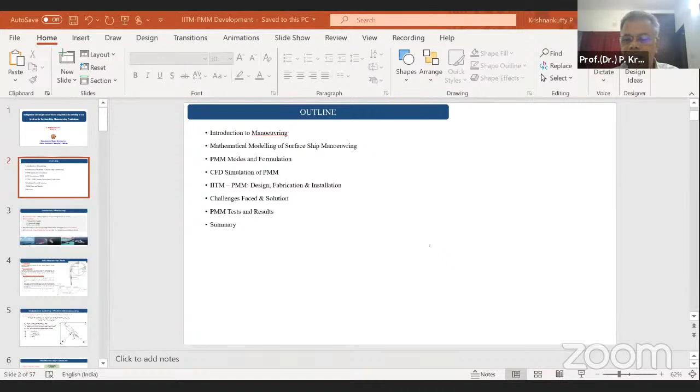So just coming to the topic, what I would like to present here is indigenous development of a planar motion mechanism experimental facility at IIT Madras for surface ship maneuvering prediction. What it means is, maybe there are people not from naval architecture background, or people who learned naval architecture might have forgotten about PMM. PMM is an experimental facility called planar motion mechanism. Sometimes people use HPMM, horizontal PMM, primarily used for surface ships, not for submarines. In the PMM, it is an add-on facility to a towing tank facility, where resistance and propulsion experiments are carried out. In the PMM facility, you fit a model and subject it to different modes of prescribed oscillations, and measure the hydrodynamic reaction forces and moments. This data is used to get the hydrodynamic coefficients, or hydrodynamic derivatives. These derivatives are used in equations of motion representing surface ship maneuvering. Along with that, you put rudder and propeller effects, then solve the equation to get velocities and subsequently integrate it to get the displacement or trajectory of the vessel.

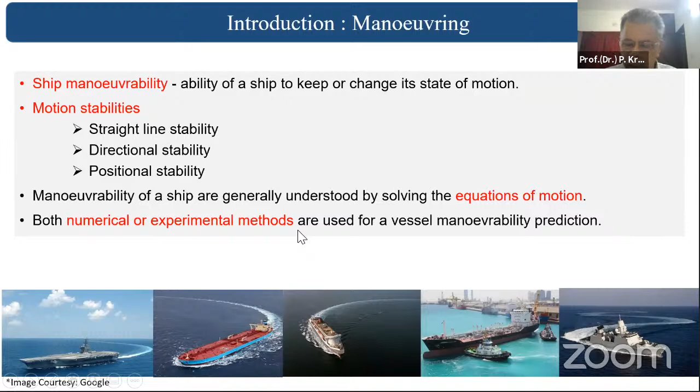So to get the prediction, as I explained, you can use numerical methods or experimental methods to determine the hydrodynamic derivatives. Now, the IMO has set criteria for maneuvering of ships.

These criteria need to be met for the ship to operate. Nowadays, IMO is insisting these things be verified even at the design stage, using CFD methods. Also, maybe just prior to finalization of the design, it's better to go for an experimental method to ascertain the maneuverability of the vessel and check whether the parameters are within the IMO specified criteria. I'm not going into the criteria details.

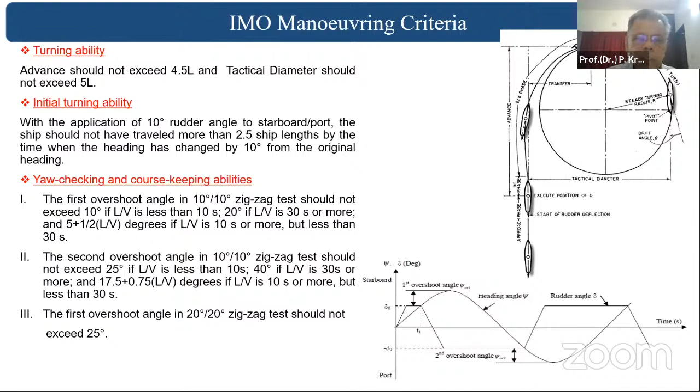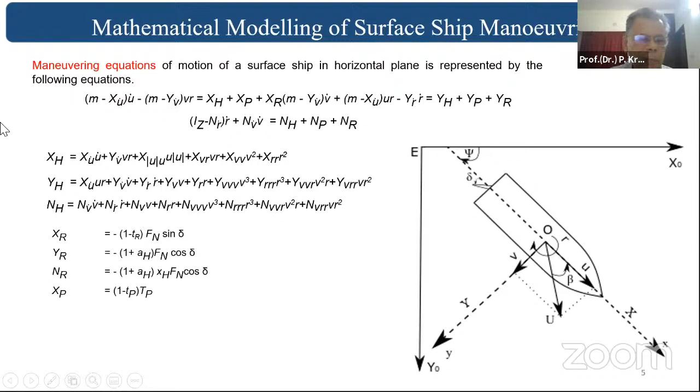I think there's some mismatch here, the equations are merged together. These are three equations that got jumbled up. This is basically the surge equation, and from here the sway equation starts, and then here is the yaw equation. These are the rudder and propeller derivatives which are used, and these are the hydrodynamic coefficients which appear in the equations of motion.

Now when you come to ship maneuvering, the approach used is in model tests. In the prediction, you go for the experimental method with a ship model. You can do straight away the free running model, where the ship model is fitted with a model propeller and model rudder, and the propeller RPM will be adjusted to get the required speed, and the rudder operated to get the required trajectory.

So that is what is done, it's a free running model, where the model itself runs with its own model propeller and rudder. Another approach is determination using the modular method.

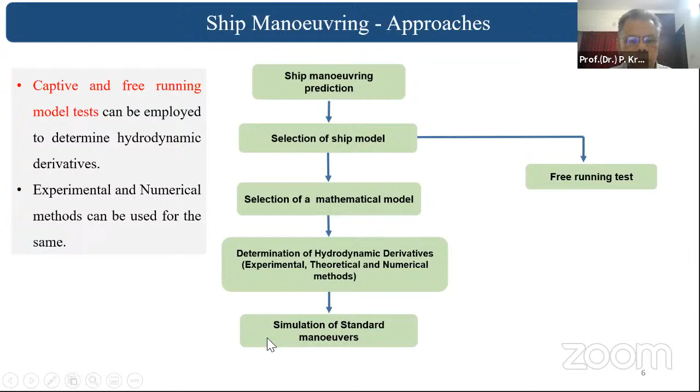In the modular method you use a mathematical equation. As I explained before, you estimate the hydrodynamic coefficients appearing in this mathematical equation, and then solve it to get the vessel trajectory. Then you can find the turning circle or zigzag maneuver and check against IMO requirements.

If you look at the PMM modes and formulation, this is a conventional PMM method where you have two oscillators, one at the stern and one at the bow. These two oscillators can be operated independently, and you can control the phase difference between them to get the required mode of motion in the PMM.

At each position you may find load cells which measure the loads, and you can estimate the moment from the displacement, the distance between these two struts.

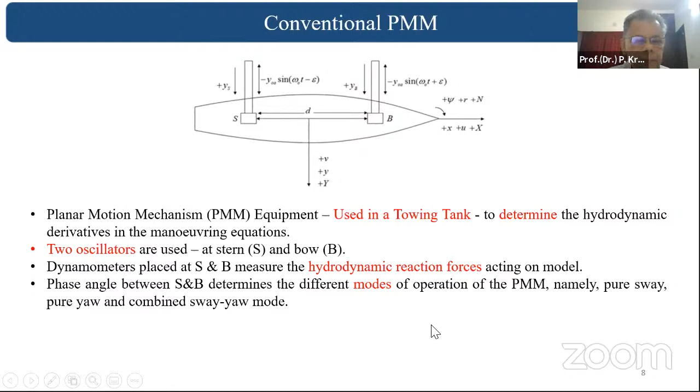So these are the different modes considered in the PMM. This is pure sway motion, where the model axis always remains parallel to the axis of the tank. You can see this line shows the axis of the tank, and the model axis remains parallel, oscillating like this, so this is pure sway mode.

When it comes to pure yaw mode, the axis of the model is always tangential to the path, which is always the case, so this is called pure yaw mode in PMM oscillation. You can also use combined sway and yaw, where you give a drift angle.

You can see here this model, the drift angle is given and it follows something similar to the yaw motion. So you get combined sway and yaw. The drift angle gives a sway effect, so this is a combined yaw and sway motion.

So these are the three modes of oscillation in PMM, from which you will be able to get all the required hydrodynamic derivatives which appear in the maneuvering equations of motion.

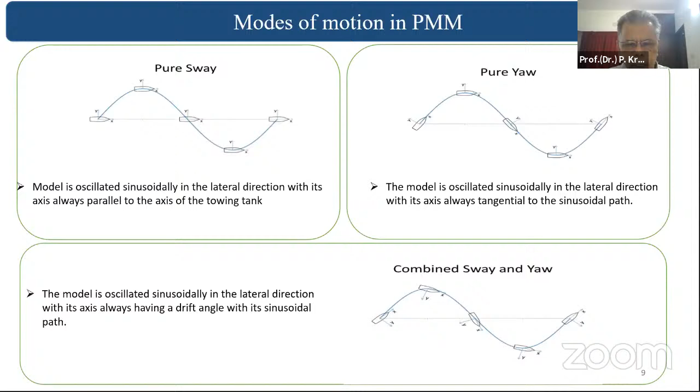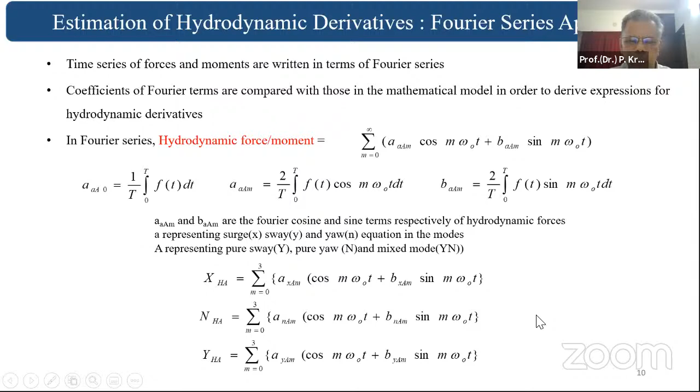Once you perform the test with these modes, you get the force history, or you record the force history, and you can use the force history, which is sinusoidal in nature or maybe oscillating, and represent it using a Fourier series, as shown here. From the Fourier series coefficients, you will be able to estimate the hydrodynamic derivatives. That's the process involved through which you get the hydrodynamic derivatives.

In this present study, what we have done is use the KCS container ship, which is an international benchmark being used by various leading researchers around the world. So we also selected this KCS model for the study so that we could compare it with international results presented by different agencies from across the world. So we just went for the same ship.

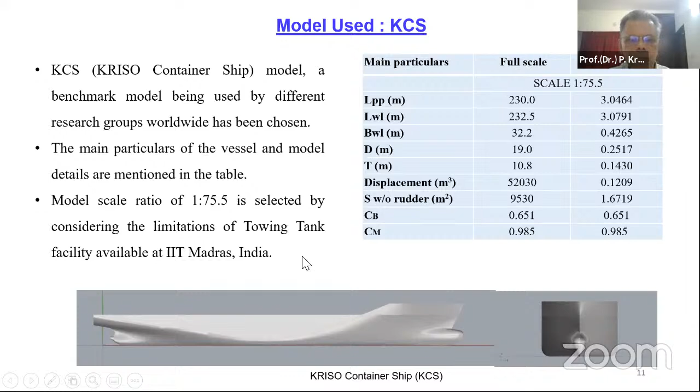This is a fabricated model. The model has been fabricated in our in-house facility. This is the model of the container ship, the KCS model. This is a model propeller which has been made using stainless steel material. You can see that stainless material, and also this is the rudder.

So this is what we have used. We use a rapid prototype machine for that.

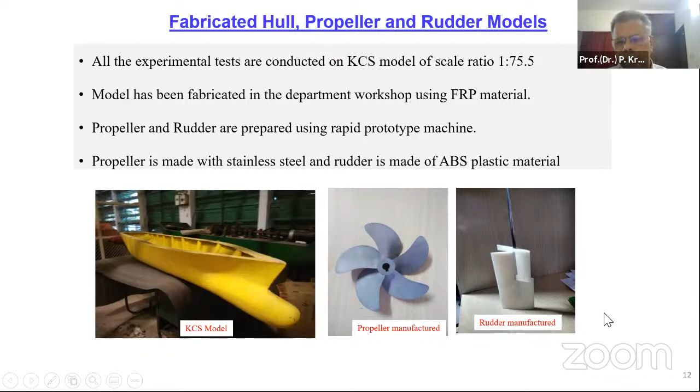Coming to the experimental PMM setup, you can see this is a view of the towing tank of IIT Madras, and there's the carriage what you see here, and you can see the PMM is already erected in this. There is an open space inside the carriage through which the PMM facility is attached, and the model is fitted to that, and that model is subject to oscillation.

You can see the details of the arrangement here. This is the opening which we get in the carriage. The opening available was only 3 meter by 1.35 meter. We had to utilize that space to accommodate the PMM plus the model and all the setup. So that was a big challenge.

We went through different difficult situations, because we could not alter the carriage, we could not alter the towing tank, because that is meant for other experiments. So we had to find a facility, utilize the space, and accommodate the setup.

So here you can see this is the PMM setup. These are clamped, you can see there are 4 clamps which are clamped to the carriage, this bar. So this is actually suspended, rigidly suspended from this bar.

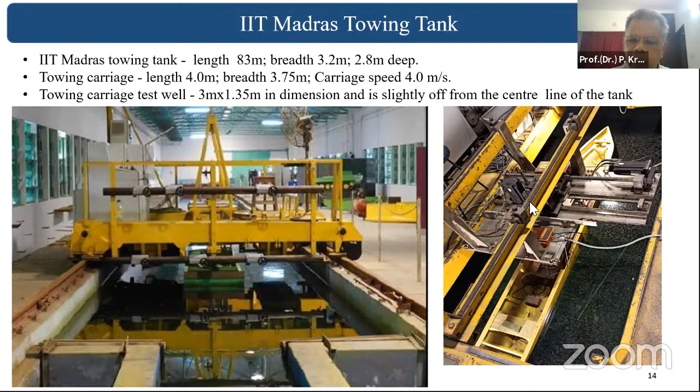You have to use this with a program which will give the required motion mode for the PMM. So the process was design, fabrication, installation. Initially, we had to find out what is the capacity, what load is coming on the system, what load is coming on the load cell. We had to make an estimation of the amplitude limitation and the frequency limitation of oscillation. All these things were judged or estimated based on the space availability.

So we found that up to 400 mm sway amplitude can be obtained, and a maximum yaw amplitude of 15 degrees. If the yaw amplitude is increased, it may go and touch the tank boundary.

So the frequency also we have looked into. Based on which we are in a position, and we also know the model size, everything, we estimated the total expected force and moment, based on which you have to design the structure, the load cell, and subsequent components. So all these preliminary estimates have been done before finalizing the technical specification for the PMM facility.

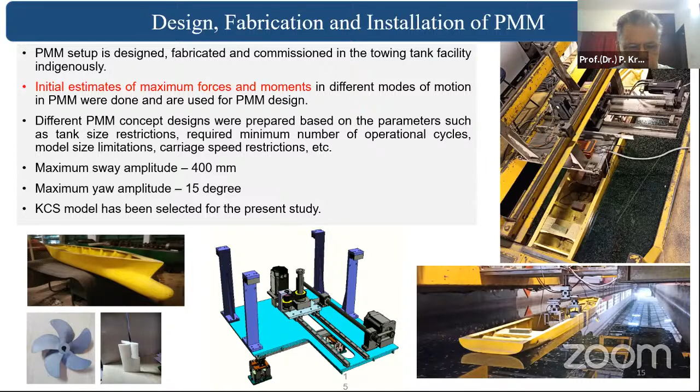And once that technical specification has been made, it has gone through various revisions and discussions, and finally it went for the tender notice. It went for bidding, and finally we could get the right bidder, fabricator for that, and so that's how it's installed.

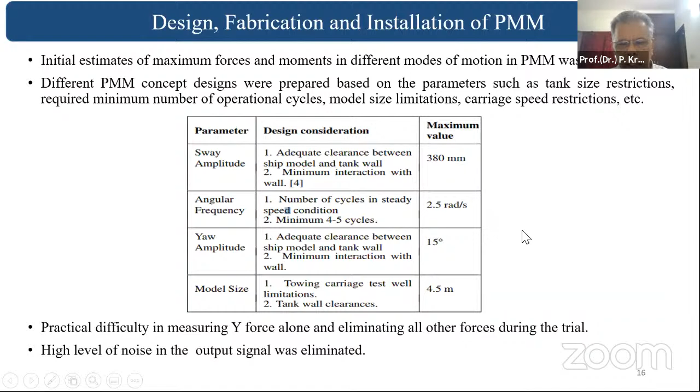This is again the frequency. You can see that maximum 2.5 radians per second, and the amplitude has been reduced marginally through 380, 15 degrees maintained for yaw amplitude, and model size maximum 4.5, but the model size which we use is only 3 meters. Another important thing to keep in mind is that the tank length is only 83 meters, and minimum 4 oscillations you should get for the PMM, and the oscillations will start only after reaching steady speed. So we have only limited space, and in that limited space, 4 oscillations, so all these restrictions come into picture.

So now these operations, this is a more close-up view. This is the sway motor, and this is a belt. The sway motor is controlled, and then the belt drives this lead screw, and you can see there's a bearing unit which moves, and the model is connected to that. The model gets moved with that. This shows a rotary motion.

That's for the yaw motion. So in yaw mode, only this motor is operated, this is not required to be operated. But when it comes to sway mode, this is operated. In yaw mode you have to use both, and also in mixed mode you have to use both.

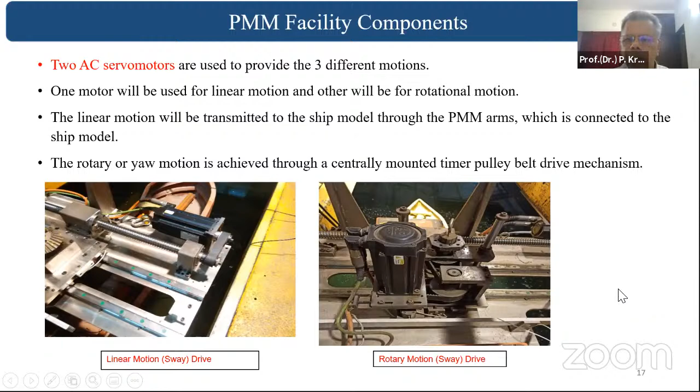So that is the arrangement. Coming to the load cell mounting, you can see the load cell mounting here. There is a load cell kept here, so the reaction force coming on the model needs to be restrained with the load cell inside. The mechanical system has been developed like that, and only the X force and Y force, or tension force, has been measured using the load cell.

The load cell used is a single component load cell, which has been used in this setup. We have two of these kept at the forward and stern positions, the equivalent positions. This load cell readings go through a signal conditioner because there will be a lot of noises generated. The signal conditioner is an electronic system to some extent, and that data is fed to the system, or it is recorded. That's the measurement system.

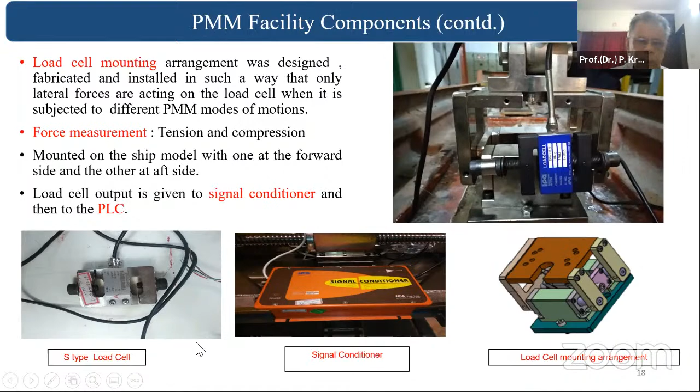So the operation of the PMM is done by a drive control panel, which is again placed inside the carriage. We could find some space for this whole unit, which is a control panel, a cabin for the control units. This shows the inside view of the control panel. This has been developed.

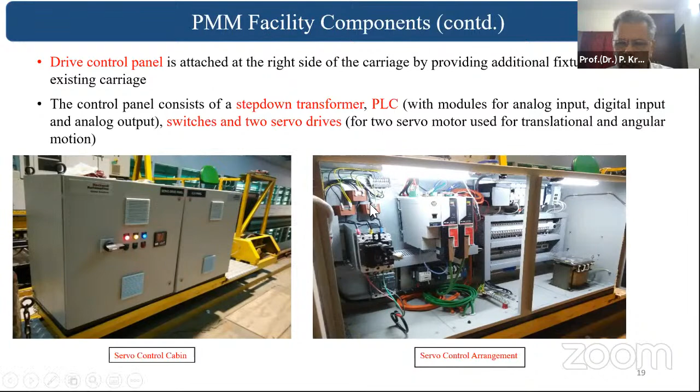And then the whole operations are controlled using the PLC, which controls the movement of the two servo motors, that is the yaw motor and also the sway motor. By changing the parameters, which can be put into the HMI monitor, you will input the information using a user-friendly menu, and that is transferred to the drive system, and the drive system operates the PMM system.

Okay, now this is another view of that. This is a view of the model. This is a different model, I think, which is kept here.

And here, this is a system. If you look, this is a carriage. You can say this is the HMI here, and then you have the carriage system. The carriage is driven by 4 motors, and that is the arrangement inside the carriage.

Then from this, you have the PMM frame. There's a connection for the sway mechanism, and another one for the yaw mechanism, and finally it's connected to the ship model. By using the PLC and the drive system, these mechanisms are driven in a controlled way to get the desired mode of motion with the desired amplitude and frequency. So that's how this is controlled.

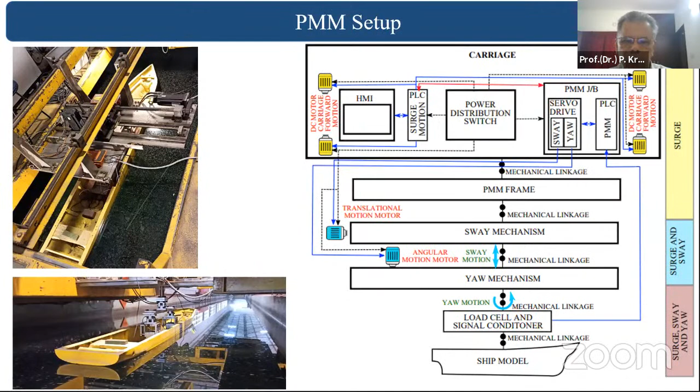So this is already discussed. There are motors here. You can see this is a computer model and this is the actual one. The diagrams show where the motors are kept.

This is the yaw motor. You can see from here, this is the yaw motor, sway motor, this is the yaw motor, and then the lead screw. So all these mechanisms, these are the mountings - the violet color are the mountings, and the green one is the bar, which is part of the carriage.

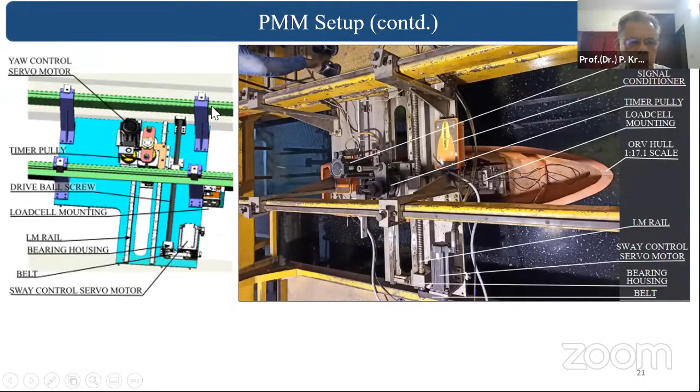So the mounting arrangement is also explained, this is a mounting mechanical system. This will get mounted onto the base of the model, with the load cell giving the reading at the 2 positions.

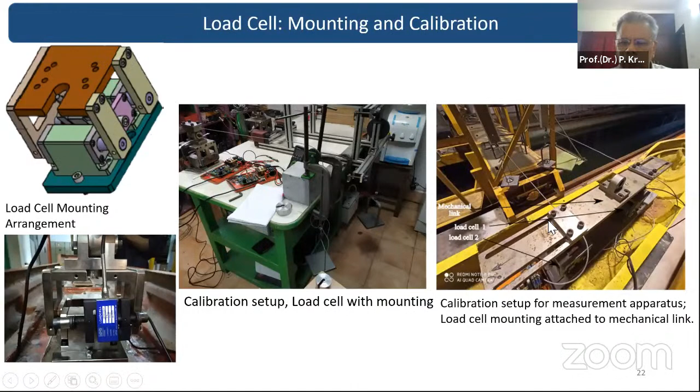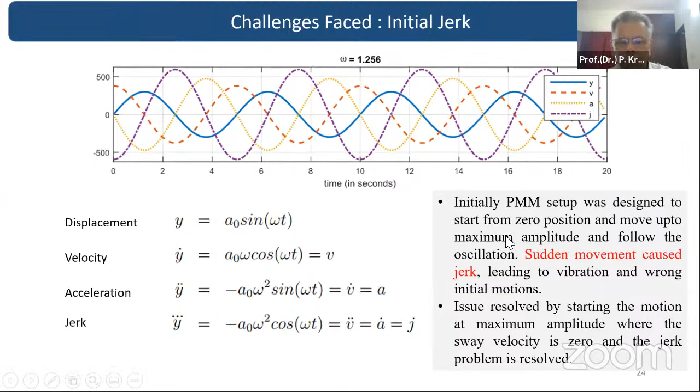So this shows the oscillation. We faced some problem - there was some jerk, oscillation initially. This translation or deviation is caused by the bevel gear system, which has gear teeth giving vibration and also a jerk. So these problems have been identified and rectified.

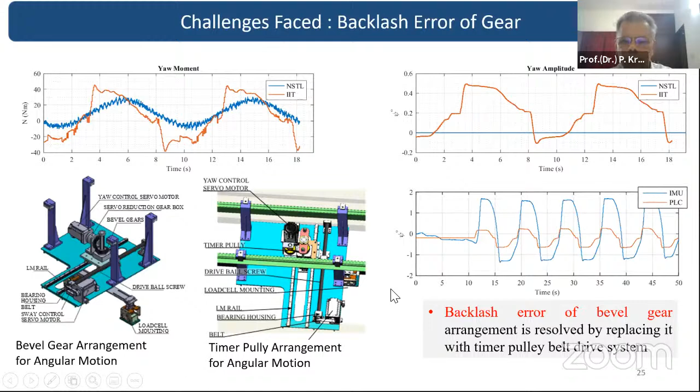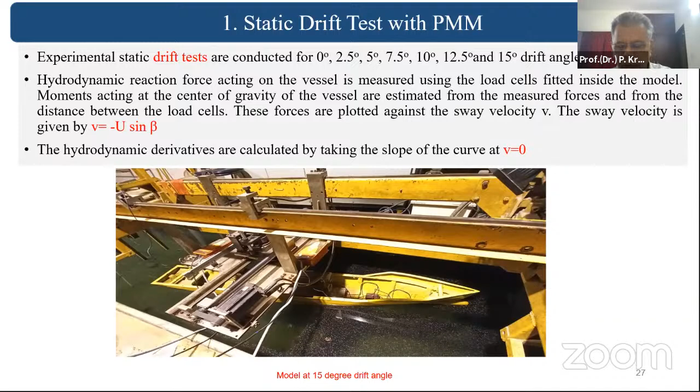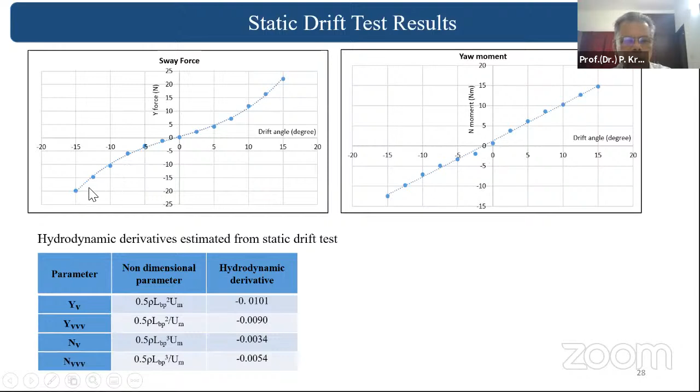You can use PMM for that, and also for the oscillation test. So what you do is for different angles you plot the forces, and from which you can get the derivatives.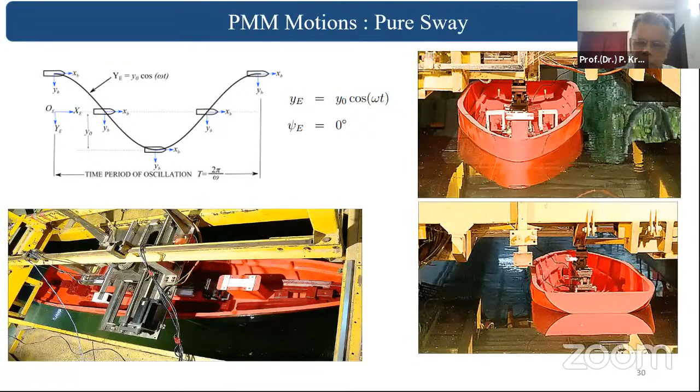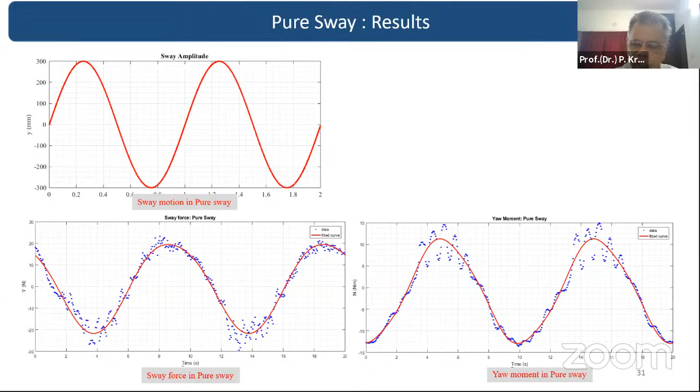Dr. Rajesh, are you able to see the video?

Rajesh, you're there? Yes, sir. Seeing the video, right?

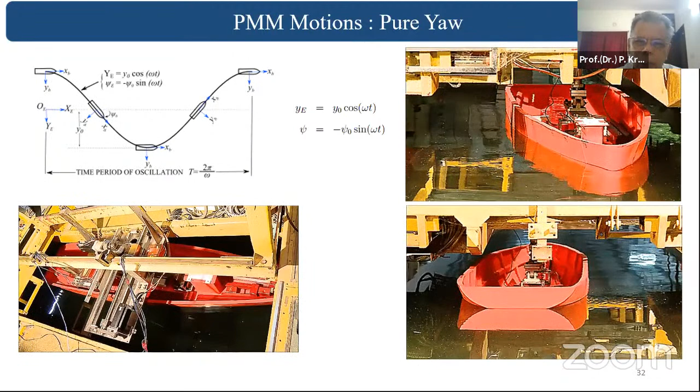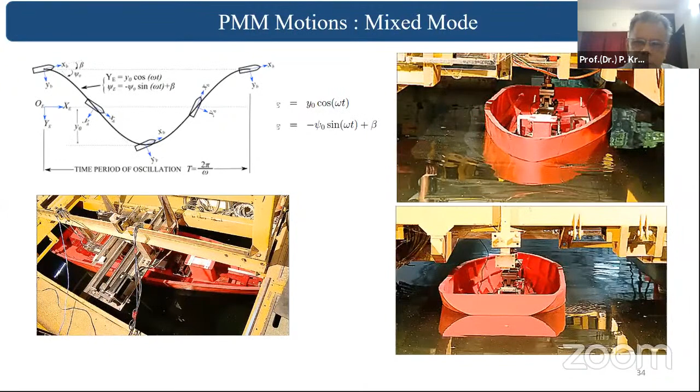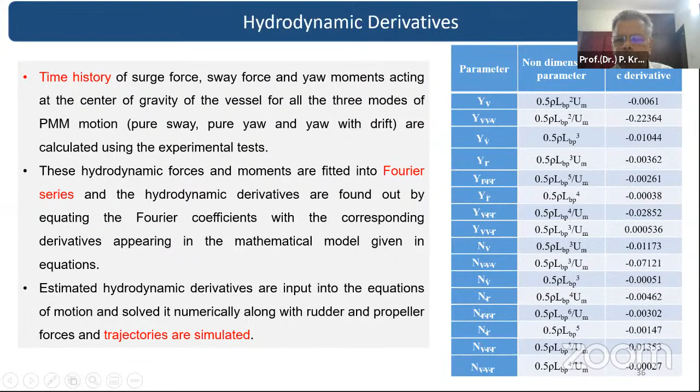Once you get the hydrodynamic derivatives, as I explained before, you get into the mathematical model defining the surface ship maneuvering. Then you substitute these hydrodynamic derivatives in the equations of motion, and also include the rudder and propeller derivatives. Then you can solve this equation, that is the sway and yaw equations jointly, and after substitution you get the sway and yaw velocities. Then you integrate it, and you get the x and y coordinate of the vessel against time. So that is what you get.

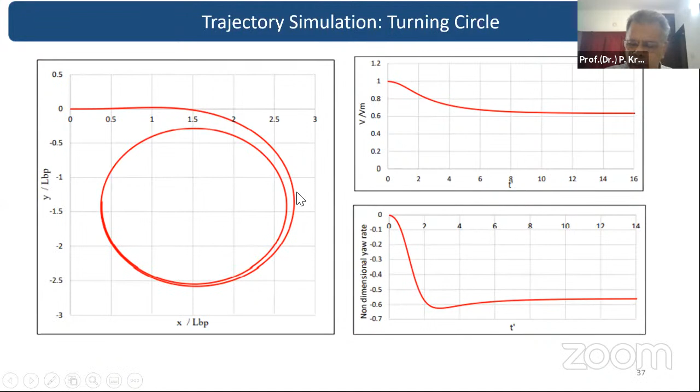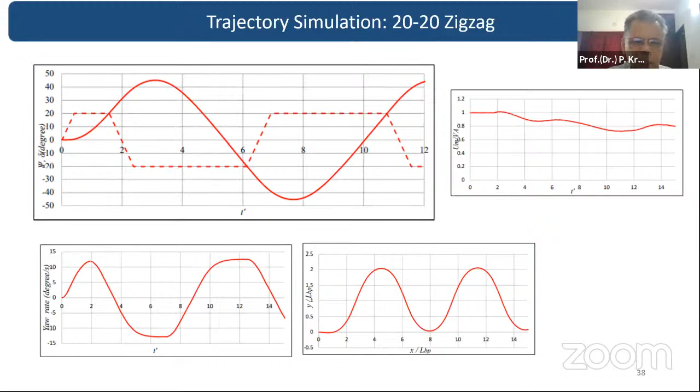So if the trajectory is a turning circle, I think in this case the rudder is put to 35 degrees, and then a turning circle maneuver is performed. That's how it's predicted. Similarly, you have a zigzag maneuver. These are the two things which you have seen in the IMO slide, which prescribes the zigzag maneuvering parameters and turning circle maneuvering parameters. So you can simulate that here.

The same model has been taken to NSTL Visakhapatnam, where we could use their new facility, the maneuvering and seakeeping basin. We did a free running test and also the PMM test there, because we wanted to check the values obtained from an already established facility and how it compares with the facility which we developed. So this study was primarily for validation of the PMM facility developed at IIT Madras.

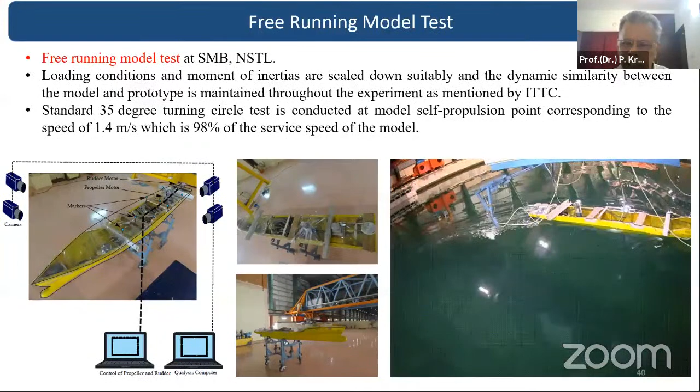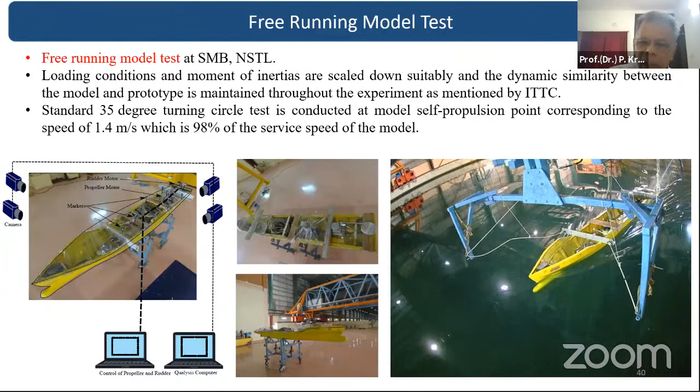So this was also a hectic task. We had to take the model to Vishakhapatnam. That team had to go there, and of course the NSTL scientists helped a lot in setting up the whole thing, and they were lenient in providing the facility to us, so we are thankful to them for accommodating us there.

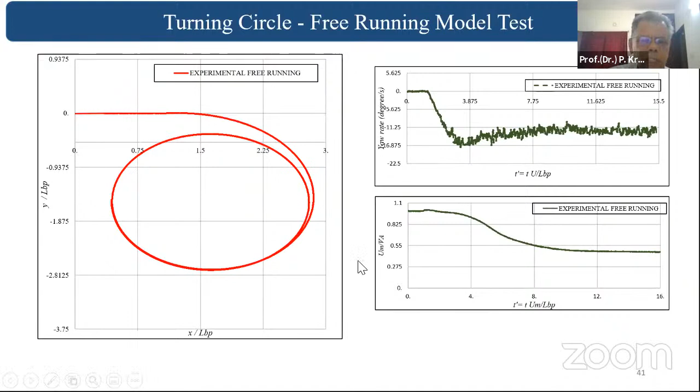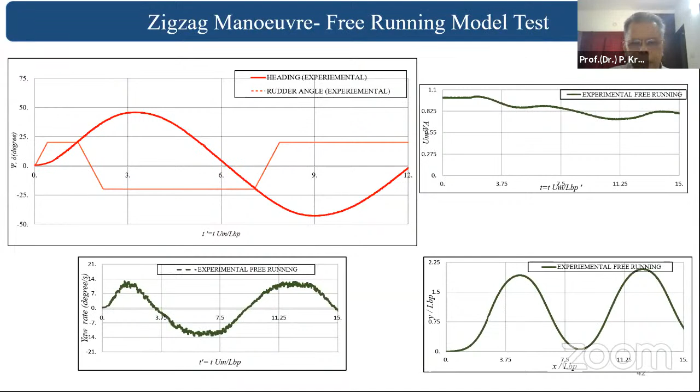Subsequently, this is a turning circle maneuver which has been done, the video which you have seen. If you look at the trajectory, this is how it's obtained. So these trajectory values are compared later. This is a zigzag trajectory for the free running model test. When you say it's a free running model test, that means the model is run with the help of its own propeller and rudder, and it is controlled.

So subsequent to that, what we did is, most of the PMM facilities work in deep water condition. This is fine when you talk about ocean going vessels that operate in deep sea conditions - the hydrodynamic derivatives you get from this type of test in deep water conditions are okay. But when the ship comes into restricted waterways, particularly when it operates in inland waterways or rivers or maybe in harbor areas, the shallow water effect comes into picture - that is the feeling of the bottom. It's not that the ship is touching the bottom, but when it's getting closer, when the under keel clearance is less, the effect will be more. So we wanted to study that effect using the PMM.

So we wanted to have a platform, and the platform should have an adjustable water depth. The platform should not be a permanent fixture - it should be detachable, removable, handled properly, and give sufficient length. All these problems were there, so we did the calculations and went ahead with the design. We found that one piece should be 1.5 meters along, and the width is 3 meters. So that is how it's done.

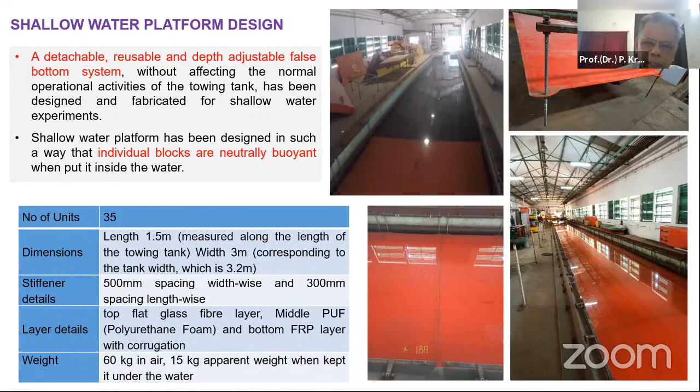We had an arrangement for lowering and changing the water depth, or changing the level of the platform. So we did the studies, and the PMM with the ship model operates over it, so we get the shallow water effect with this facility development. This means we had developed a PMM facility which usually works for deep water conditions, and we developed a platform with adjustable depth which could give the shallow water effects on the maneuvering characteristics of the ship. So these are different modes done over the shallow water. You can see the red color below - H/T, that is water depth to draft of the ship model, is 1.2.

This is a really shallow water condition. You can see the operations. Subsequently, we predicted - I'm missing many steps in between - what would be the effect of this shallow water on the trajectory. You can see that if it's deep water, it's coming very close, only this much, whereas in shallow water it may go up to very large. That means a vessel operating in shallow water region takes much larger space for a full turn compared to the same vessel operating in deep water condition.

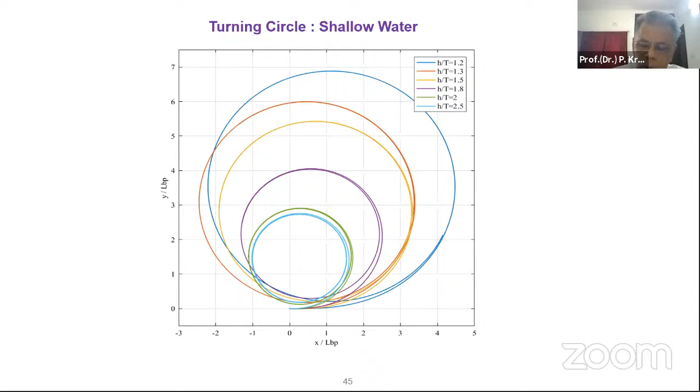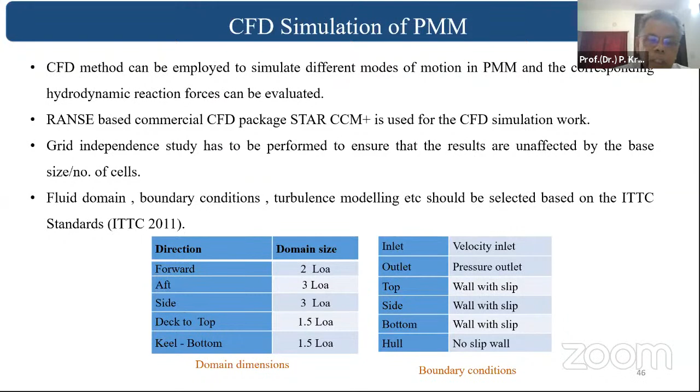So the vessel, when it enters the shallow water region, needs to be very careful because the controllability becomes very difficult and sluggish. We also did some CFD analysis. I'm not going into the details of that - maybe time is a constraint.

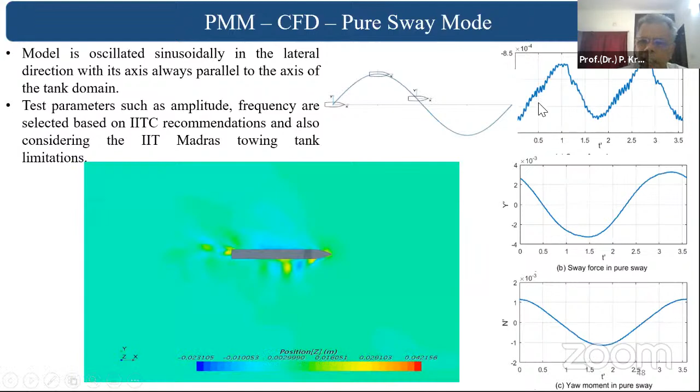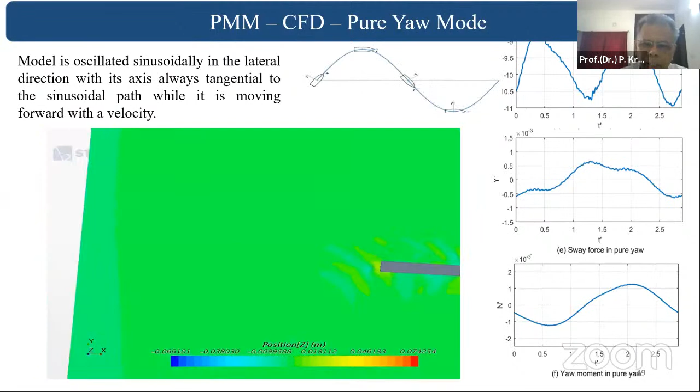So this is the modeling part and parameters. We simulated the pure sway mode, pure yaw mode, and these three modes. You can see how this CFD analysis works - on this side the force histories here, and this is for the pure yaw mode. This is in the CFD environment. Of course this is not matching with the title, but I thought maybe I'd just show you this CFD analysis and how it's compared with the experiment.

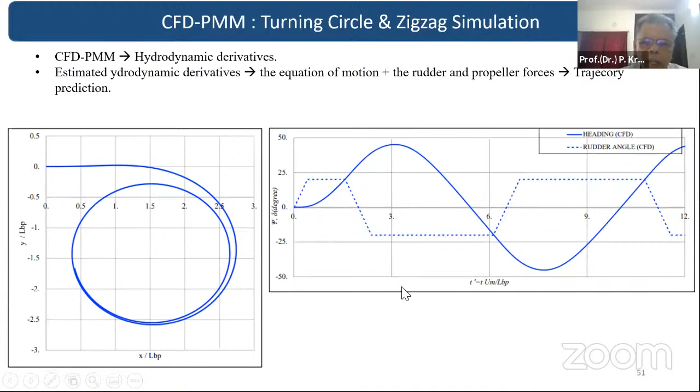So from the CFD we estimated the turning circle and zigzag maneuver. Also in the CFD environment, we did a free running test with the same model size, same model parameters. You can see them running. The whole domain - this is a relatively new option available in the Star CCM CFD package - saves a lot of computational effort. Otherwise you have to identify the whole domain and do the analysis, which is a hectic thing. Now here, this option allows the domain to move, oriented with the vessel. That's how it's done.

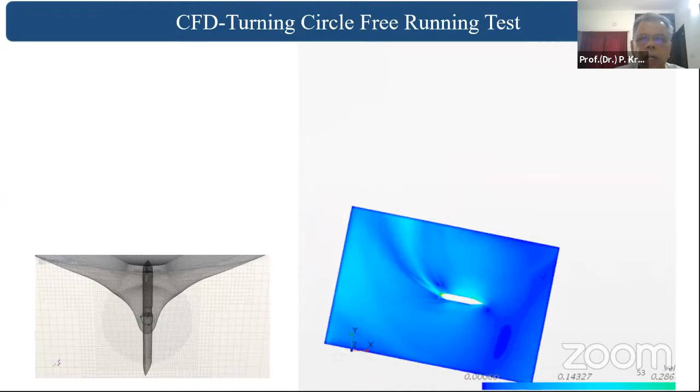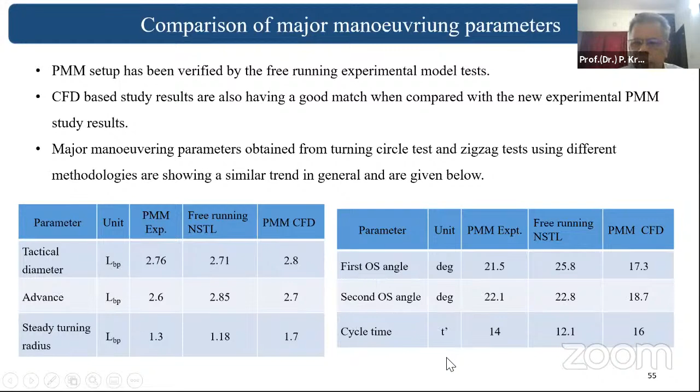First thing is it's indigenously developed. You have to know that PMM manufacturing, supply, commissioning - everything is a monopoly of a company in UK, Cussons. I think recently it has been taken over by a company called Trumpers. We approached them to give a quote for the PMM facility in our towing tank. A few years back, maybe 7-8 years or even before, they quoted 4 crores - okay, for a small facility. We did not have funding, and IIT would not support this.

So then there was a thought to go for an indigenous solution. There are other advantages: maintenance and repair become easy, it's locally available, and cost is less. We gain a lot of expertise in the PMM mechanism, and also can do modifications if required. We are in a position to do it now because we developed it ourselves. It involves basically a lot of mechanical systems, electrical systems, electronic systems, and control systems - many things that need to get integrated into such a facility. So we took the challenge, did it indigenously, established it, verified it, calibrated it, and shown that it's working fine, no problem.

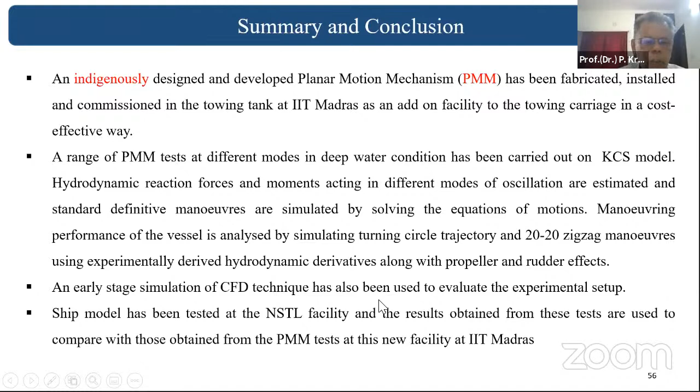So this is what it's all about. I'd like to share with you for today. So maybe if you have any questions, I'm willing to take them. We still have some more time.

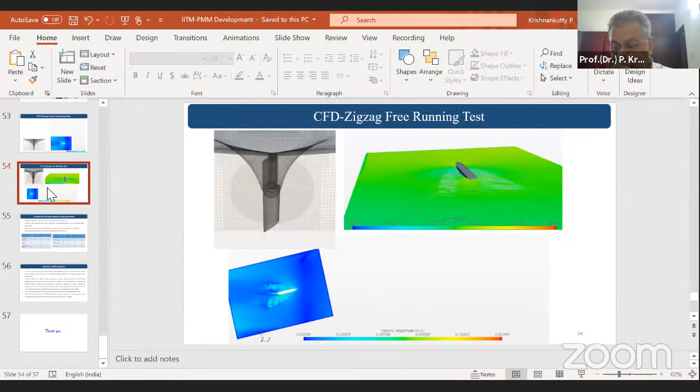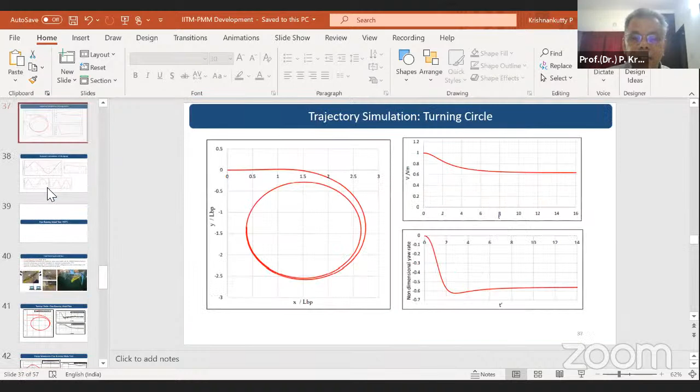Basically, the system is mounted on a carriage. Maybe I think you are referring to this one, right? Yes. So these scatterings are basically the noises which are coming from the carriage movement. The carriage is operated by 4 motors, and it's moving on a rail. The rail you cannot expect to be perfectly smooth, so the rail movements give some noise, vibration, and also the PMM system, when it oscillates, along with many mechanical systems which are used, may induce some variations.

So this we have to eliminate. Even though the signal conditioner is there, still some of the data is not eliminated. So what we do is we make a fit to the points, a mean fit, and based on that, the curve is used for further analysis, for the Fourier series representation and further analysis.

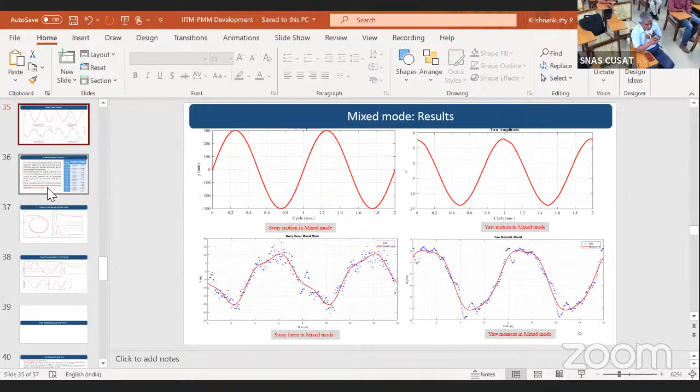I have one more question. In your CFD analysis, we can see that the wake is touching the boundary. Is this a cause of concern? CFD here? Yes, in your moving domain analysis.

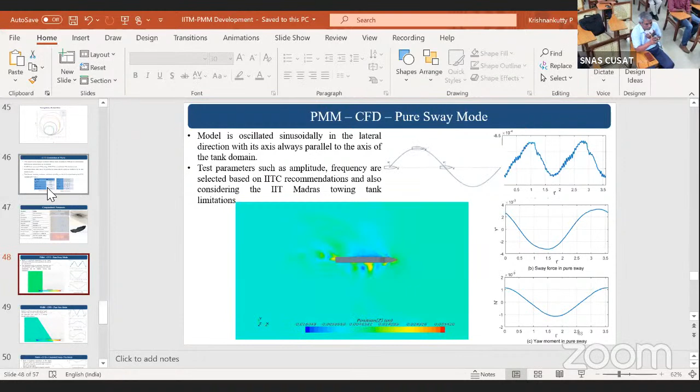Moving domain analysis, okay. Here. Yes. Okay, the wake is touching the boundary of the domain. No, the thing is the vessel has already crossed the wake area, and the vessel is not moving at a very high speed where you'd expect the wake to overtake the ship, and also the whole test is done within one cycle. If you are doing it, then it won't get into the wake of the next cycle.

So that wake effect, I think you see all these domain dimensions are based on the guidelines of ITTC. So that's how it's taken. I think we have followed that criteria, and we have gone through the publications and also ITTC guidelines for CFD simulations. So that has been taken care of while the analysis is done. So I think it's not going to influence the results. Okay, thank you very much.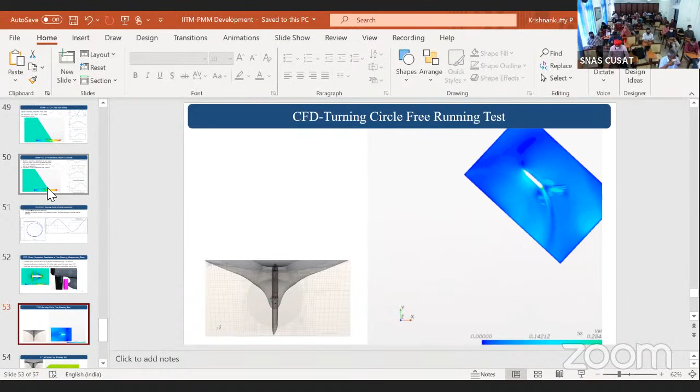Any more questions? Good morning, Professor Krishnankutty. This is Manoj from Ship Technology Department. Morning, Manoj. Sorry, sir, morning, I'm just pushing back. Yeah, that's it.

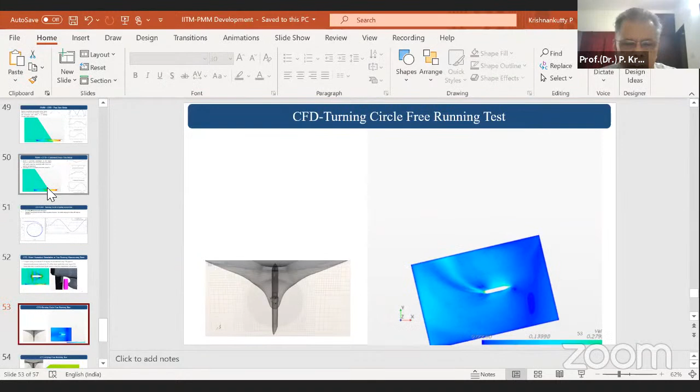Just a follow-up question on this very aspect that Dr. Ebenezer has asked. In reality, when you do this experiment in a wave basin or a maneuvering basin, you're basically entering into its own wake, right? It's that memory effect. If you're going over and over, then you have this problem.

Can you come back once again, sir? No, if you're doing a test, if you're taking a circle 2 times, then the second time it will be in the wake of the first turn. So the resistance or whatever parameter that you measure might be slightly different from the first complete turn that you have measured, right? If you are doing the experiments, will CFD take that into account?

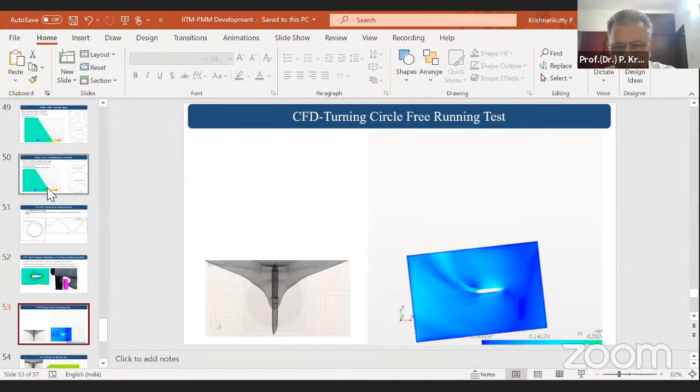Yes, well, of course, CFD takes care of that into account. So now the question is the wake, whether it's affecting. Here the thing is, actually what we are trying to, in the free running case—you're talking about free running cases, right? Okay, so in this free running case, what you have is you are looking only at the trajectory position. You are not measuring any forces or moments here.

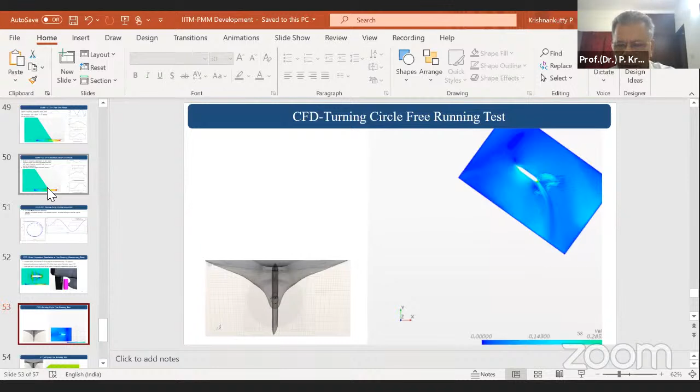So you measure only the trajectory. That information is used. That's only in the rotating arm that becomes an issue. No, when you consider the prescribed motion, like PMM or rotating arm technique or drift test, there you have to be careful about the water condition, so that it doesn't affect the reading. Whereas here, as you said, it may affect the subsequent turning, but the influence has been found to be insignificant. If you are doing a free running turning, the subsequent cycles almost follow the previous cycle. So it's not a problem as noticed so far.

In your presentation, you said the maximum sway amplitude is around 400 mm, right? Did you see any wall effect interfering with your tests? That's also a good question. Actually, we have checked with ITTC requirement, what should be the maximum amplitude in relation to the tank width, and also other parameters. We also checked the space availability in the carriage of IIT Madras. Considering all these aspects, finally we restricted the maximum sway amplitude achievable to 380 mm.

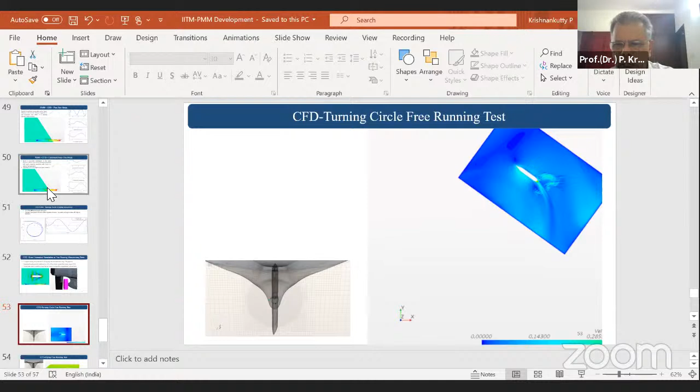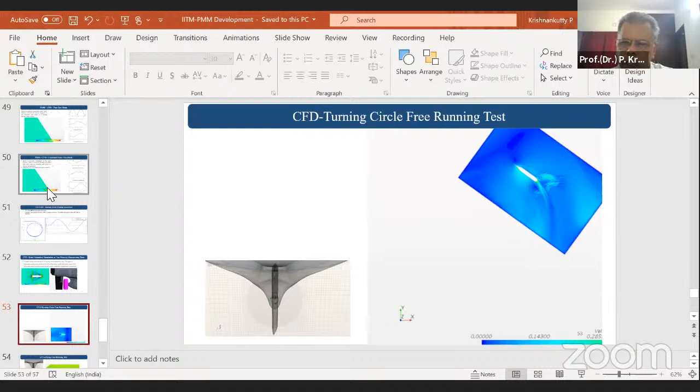So all the subsequent calculations regarding displacement, velocity and acceleration, and subsequently the forces, were based on this. We also looked into the frequency of oscillation, how much maximum frequency it can go. That frequency depends on the speed of the carriage and also the length availability of the tank, because you need a steady oscillation to get the correct forces. To get the steady oscillation, you need to perform at least 3 or 4 oscillations. So for 3 or 4 oscillations with the assigned speed of the carriage, what is the length of the tank required? Considering all these aspects, we estimated the maximum and minimum frequency it can go, and the speed it can go. So all these constraints depend on the restrictions of the towing tank facility.

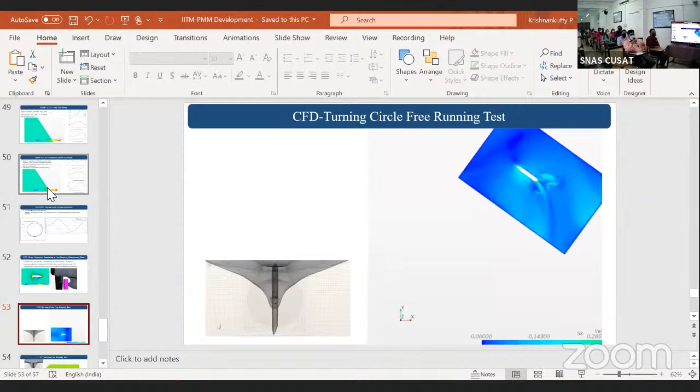The other question I have is regarding the shallow water test. How did you manage to fix that false bottom? Is it clamped on? It's a big challenge. When you're using the existing towing tank facility, you cannot tamper with it. So what you have to do is make a setup in such a way that, without tampering with the existing facility, you can erect the platform.

That's a good question. On the rails, you can see they are mounted onto the wall, and in the mounting arrangement we have a nut and bolt. We found there is a nut, I think 1 inch or maybe 1.5 inch, protruding out everywhere. So what we did is use that space - we put a clamp on this nut, and through the clamp we supported the platform.

So you can adjust the depth every time you want. We have a long lead screw - you adjust the screw at every support so that you can change the position of the platform. So if you have a bolt here, you just rotate at the top. It's not a very sophisticated arrangement, but this is what we could come up with. When you rotate it, the platform level changes. This arrangement was designed without tampering with the facility, because the tank and rail facilities need to be very precise, and we should not tamper with it since it has to be used for many other experiments.

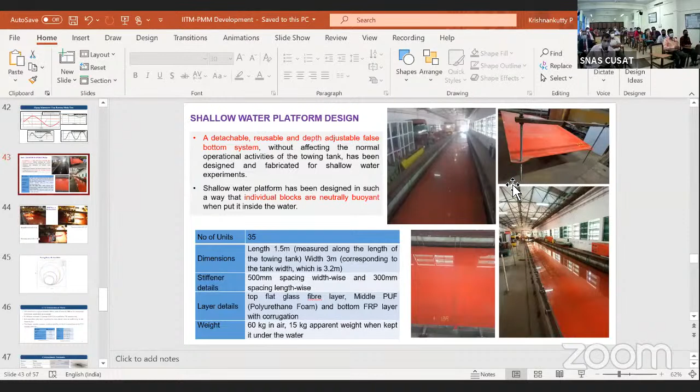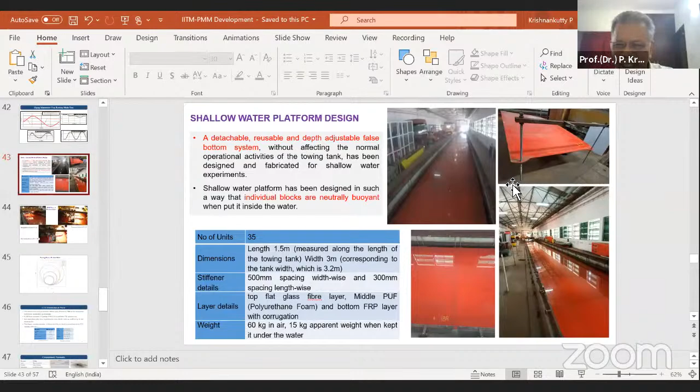Thank you, sir, for the very informative session. As a part of our gratitude for your valuable information and speech, we are presenting a memento as well as a certificate. Okay, it's okay, but I don't know how you're going to hand it over to me in this mode. Maybe you can take a photograph and send it to me. Sir, it is there -- we are sharing it on the screen. Can you see? Okay, fine.

Thanks a lot. I wish I had been there, but unfortunately I couldn't. I was in Cochin, I think last month, maybe the beginning of this month. Anyway, because of the COVID situation we've had to look into remote, online, and hybrid modes, and people are getting used to that, though it has now changed back to a normal mode. Okay, thank you Dr. Rajesh and others there. Thank you for the opportunity. Bye, okay thank you sir, thank you very much.